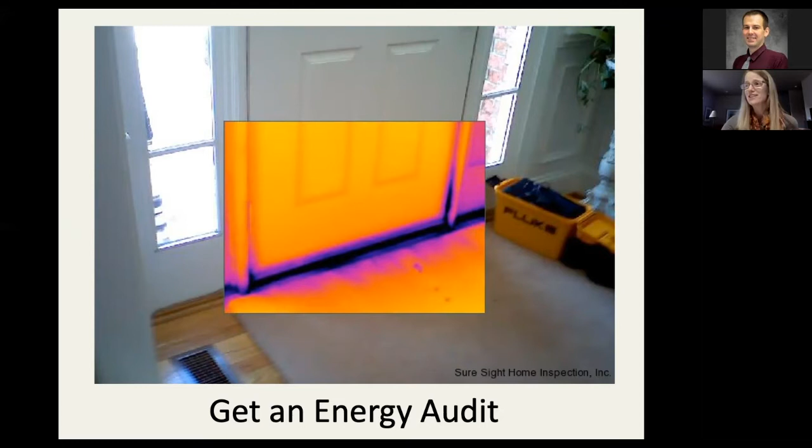And some larger businesses hire an engineering firm to do a more extensive audit. This is also a good investment because if you take any of their recommended actions, you'll earn the investment back pretty quickly through energy savings. Now, COVID restrictions may impact in-person audit offerings, so you just have to check with your utility to see what they have for you. The Green Iowa AmeriCorps used to offer in-person energy audits in the towns they served in Iowa before COVID, and they'll probably go back to doing it again after COVID.

And the first home they ever did was my home that was built in 1858. They came in with their fancy equipment, the blower door test and a thermal imaging camera. And they did an audit that revealed that the air exchange rate of my home was 50%. And they said, that's like living outside. It was definitely a drafty old house. And I see they're not doing in-person audits right now due to COVID, but you can sign up to get an energy saving kit on their website.

And if you're a business owner, I suggest you look at the EPA Portfolio Manager tool. It's the best in the industry and it's free. It's an online energy management and tracking tool that enables you to measure and track the energy performance of any building over time. They have free online trainings on an ongoing basis, and they have an excellent action workbook for small business. I'll drop the link to that page there in the chat at the end of my presentation.

And if you want to closely track your home energy use, the EPA also has a detailed tool called Home Energy Yardstick. You can learn about the latest in home energy saving solutions, and you can track your savings over time and see the impact of your actions. You can get a customized and prioritized list of energy saving recommendations for your home from the Energy Star Home Advisor, and I'll put that link in the chat at the end as well.

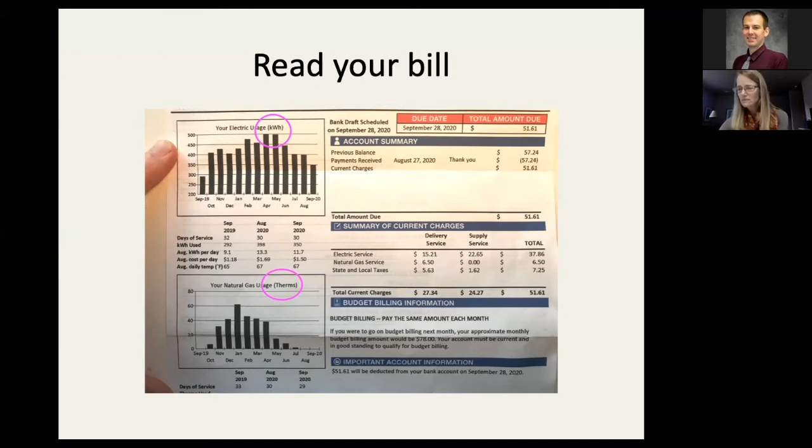Because you want to see if the actions that you're taking to reduce your energy use really make a difference on your bill. So keep track of that in whatever way works for you, and then make a plan. This is a long-term project, and having a work plan will help you get the job done. So to make a plan, look at your energy auditor's suggestions. They'll have written suggestions for you.

Look at the suggestions on the Energy Star website, either for the small businesses or for the homeowners. There are very clear steps on how to take specific measures to reduce on their website. And then figure out what you can afford. Here's some things to consider about that. You'll want to figure payback on chosen investments.

Yes, making some of these changes requires an upfront investment, and then you earn back what you invested in lower energy bills over time. Payback is the amount of time it takes to earn back your investment. Sometimes an audit by the utility company can figure out how soon you will have earned payback, or if you're a business that is considering hiring an engineering firm, they'll figure the payback for you. Figuring payback will help you decide what to invest in.

It makes sense to start with the measures that give you the greatest energy savings for the smallest investment. For many, that's lighting. Switch to LEDs. Payback is generally under 4 months for a lighting switch, and then you have continued savings after that. And then be sure to take advantage of incentives to help pay for the changes you decide to make.

You can see what's available in your area on this website. It's called Database of State Incentives for Renewables and Efficiency. You just type in your zip code to find out what you might qualify for. I'll put that link in the chat box also. There are rebates from utilities. There's tax incentives from the feds and the state listed on this website. There's loans, grants for businesses.

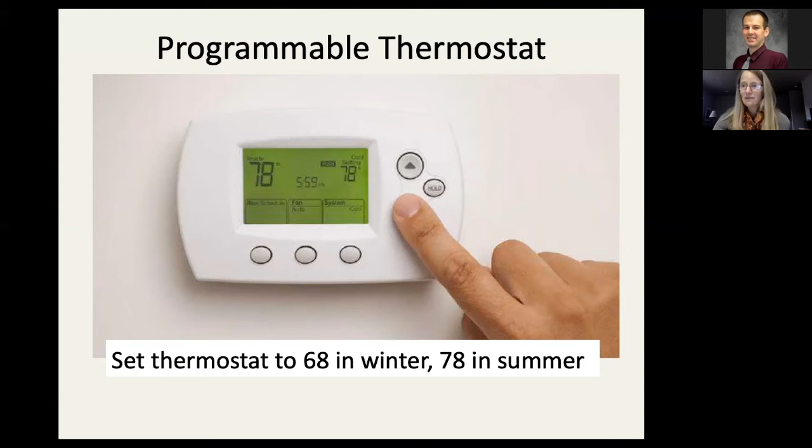And filters. It's a small thing, but it really does make a difference. Regularly replace filters on the furnace and clean filters on the air conditioner to keep air flowing properly. You don't want those machines to have to work so hard to push air through a blocked filter.

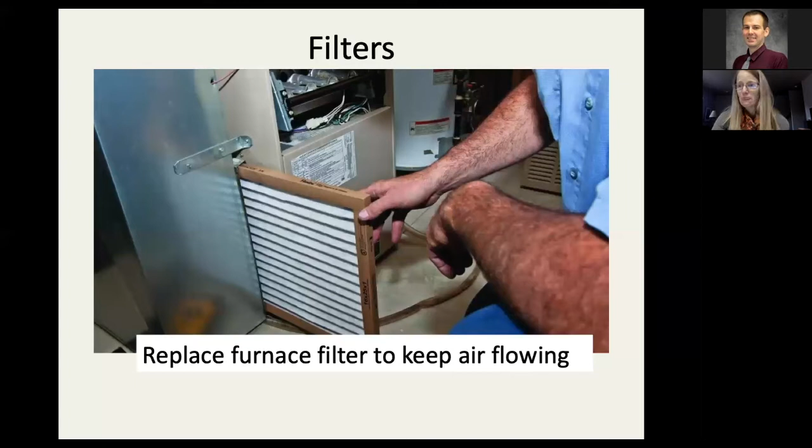And the next thing is get a tune-up. You should get an annual tune-up for your heating and cooling system. The minimal cost for a tune-up will be quickly recovered by operating the system correctly. Many congregations I've worked with have saved big bucks by getting a tune-up and properly operating their older boiler systems.

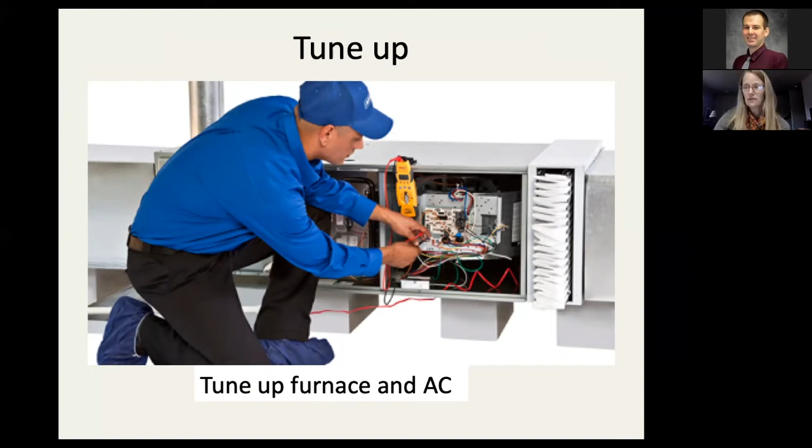And weatherize. You know, air leaks through the ceiling and the walls and the foundations and other areas typically are the greatest sources of heating and cooling losses in a home or any building. And if you don't tighten up your home first, money spent on insulation may be wasted. The average home has enough leaks to add up to the size of an open door.

So you want to plug the air leaks to seal your building envelope, such as add air gap window films to seal leaky windows in the winter. This is something that I used in my old house to make it a lot more comfortable in the wintertime.

Oh, and back to the Green Iowa AmeriCorps. After they discovered where the leaks were in my home, they spent the day sealing them up with caulk guns, foam insulation, and weather stripping. And they ended up reducing the leaks in my house from the size of an open door to the size of a window as big as a football. So I was very impressed. And the labor was and still is free. I just had to pay for the materials.

They also taped up the heating ducts for me to seal those up because I was losing heat through the heating ducts in the unheated basement. So Green Iowa AmeriCorps, I hope they get back on the ground soon.

You can caulk and weatherize around your windows and doors and tape up your heating ductwork yourself too. There were some really great YouTube instructional videos. This guy was really funny and accurate. But you may want to hire somebody to seal up the cracks where you lose your heat in your attic. That's a little more complicated. Remember to check for incentives from your utility to cut the cost.

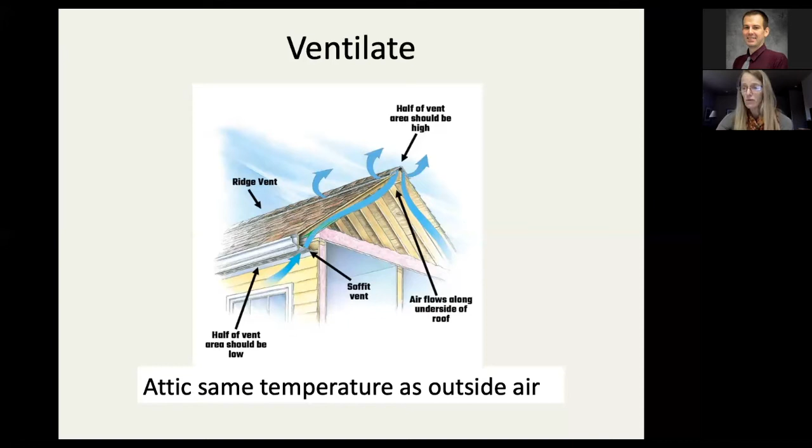And once you've plugged the leaks and properly ventilated your attic, there's still one more thing to do, and that is insulate your attic. You can warm yourself, save on heating bills, reduce problems caused by ice dams on the roof during the winter by insulating. During summer months, insulation reduces heat gain and keeps your home cool.

If you're tempted to do it yourself, I would advise you to check out this site that will help you determine if that job is for someone of your skill level or if you should hire a contractor. Many utilities offer incentives to help with the cost. The recommended R value in Iowa is now up to 49 to 60.

I hired a company to seal and insulate my attic, and my municipal utility gave me a great rebate, and they did an excellent job. And the resulting temperature in the summer was indeed 15 degrees cooler. It was such a relief. And in the winter, we no longer had a problem with ice dams.

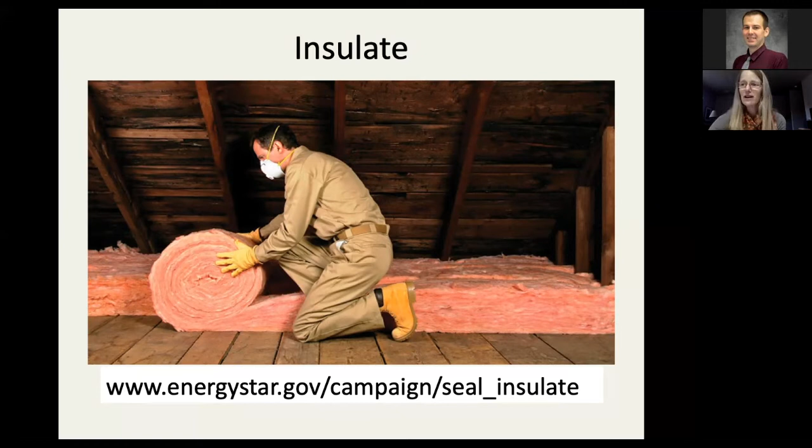And I know this next one sounds really obvious, but I have been in homes where people don't do this, and it's such an easy way to save energy. Don't forget to install your storm windows in the winter if you have that type of window. My house had the old aluminum frame combo windows, so I simply needed to slide out the screen and lower the storm windows. So don't forget to lower your storm windows.

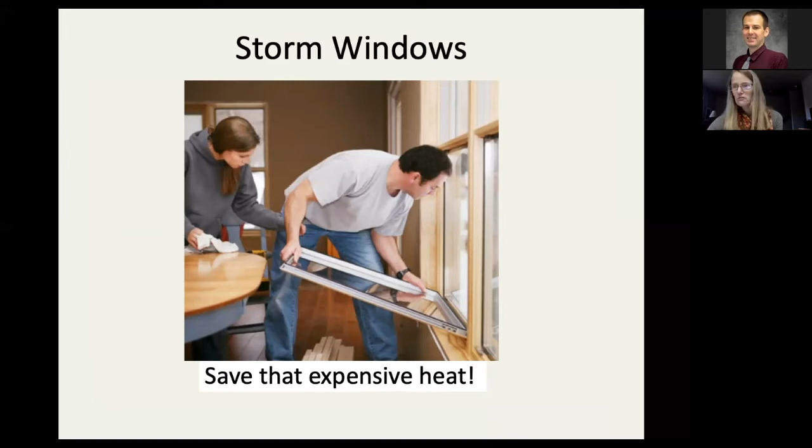And this next one is handy in the summertime. Reflective window films on your south-facing windows in the summer can reduce energy consumption by reducing the solar heat gain and cutting cooling costs by as much as 30%. It still allows natural light to enter without the harsh glare, and those are pretty inexpensive to install.

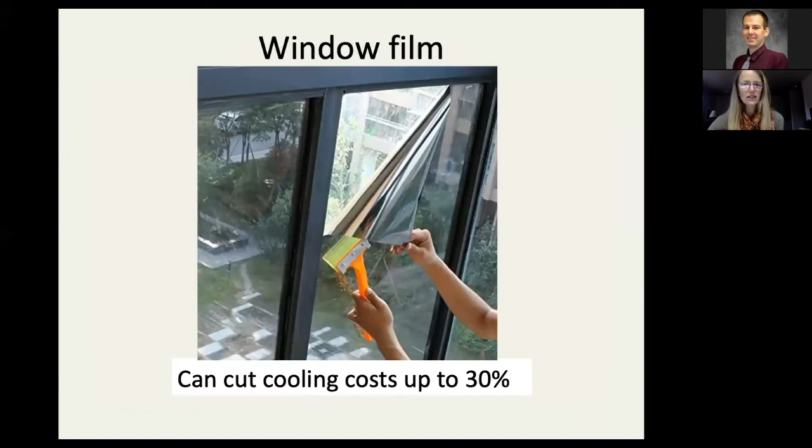And here's one other thing that doesn't cost too much and makes a difference. I had a house full of 3 teenage girls who loved to take long showers that caused a lot of hot steam to build up in the room. So they'd turn on the vent fan at my request, and then they would leave it on when they left the room. So it would run for hours.

So after the steam cleared, the vent would just continue blowing the conditioned air out of the house. In the winter, we were losing the heat, and in the summer, we were losing the air-conditioned air. So I had a timer installed on the vent fan, and that solved the problem with no arguments. You can set it for 5 minutes, 10 minutes, 15 minutes. That was a slick solution.

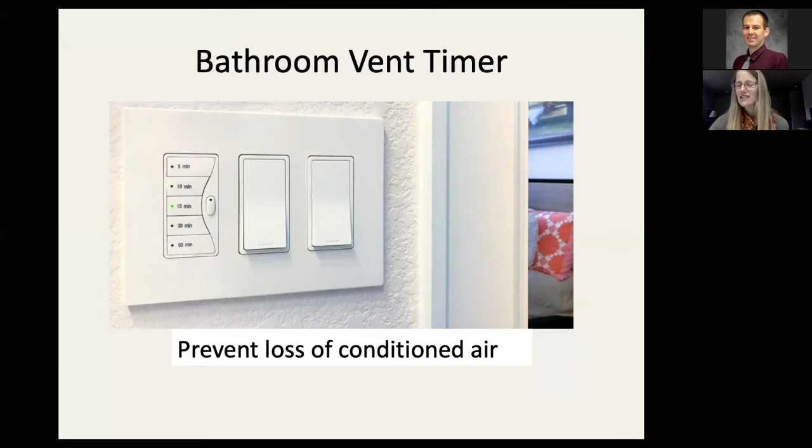And here's another one. Plant trees next to your home to regulate the temperature of your home. Evergreens on the north and west will break the cold winds, and deciduous trees on the south and west will provide cooling shade in the summer.

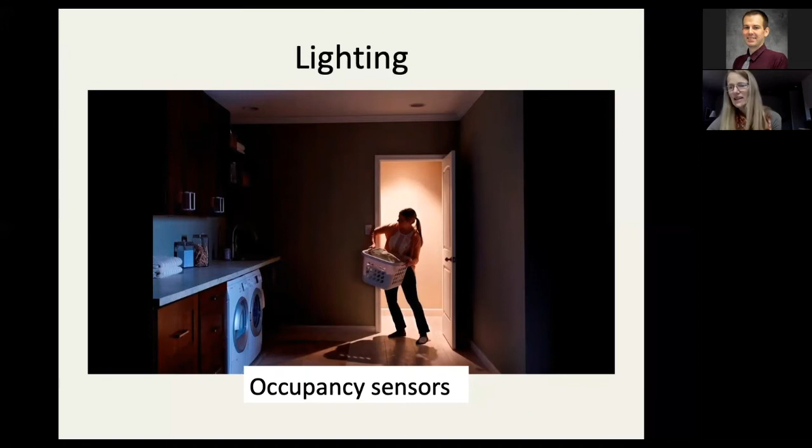And if you use holiday lights, use the new LED strings. They come in warm white and lots of colors and shapes now, and they use 85% less electricity than the regular ones. And many utilities offer to recycle the old strings as they contain valuable reusable copper.

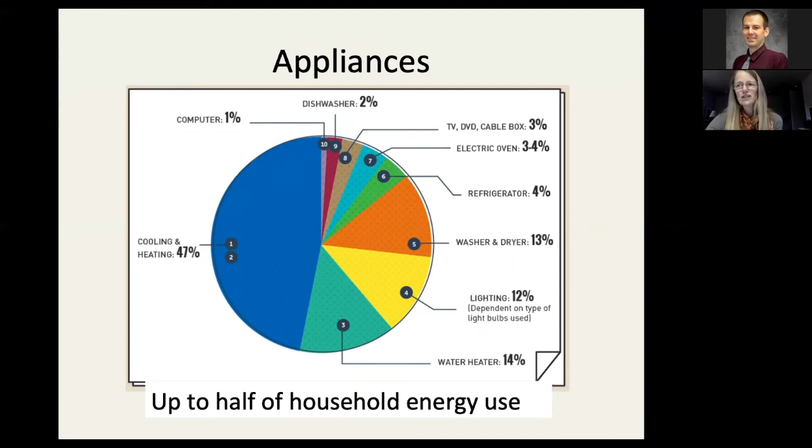So let's go on to appliances now. Appliances can count for up to half of your household's energy consumption, with refrigerators, freezers, and clothes dryers at the top of the consumption list. Your refrigerator, let's start there. This is a really simple thing that people don't know about. Vacuum your refrigerator coils on a regular basis. I do this every year when I go to my daughter's house. Each time I get off enough lint or whatever that is to make a small blanket. It's really thick. Keeping these coils clean can reduce the amount of energy your refrigerator uses by 30%.

Some coils are underneath the fridge, like in this photo, and some are in the back. You will have to pull it out from the wall to access them. And when you push it back, be sure to leave a space between the wall and your fridge to allow the air to circulate. The same thing applies inside your fridge. It needs air to circulate around inside to operate efficiently. So you may want to clean it out occasionally.

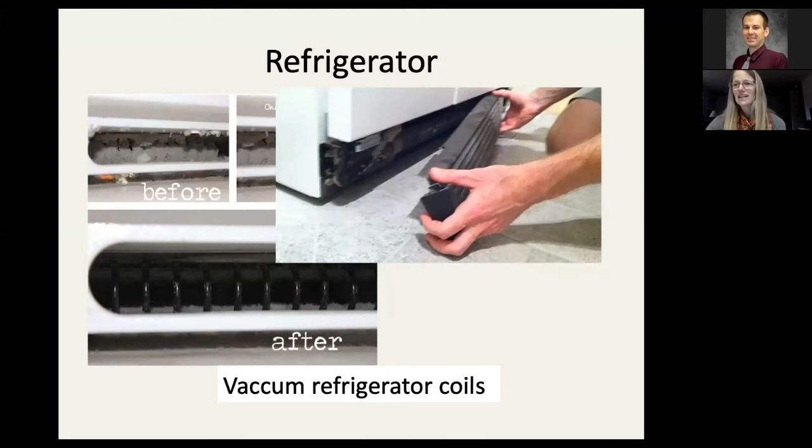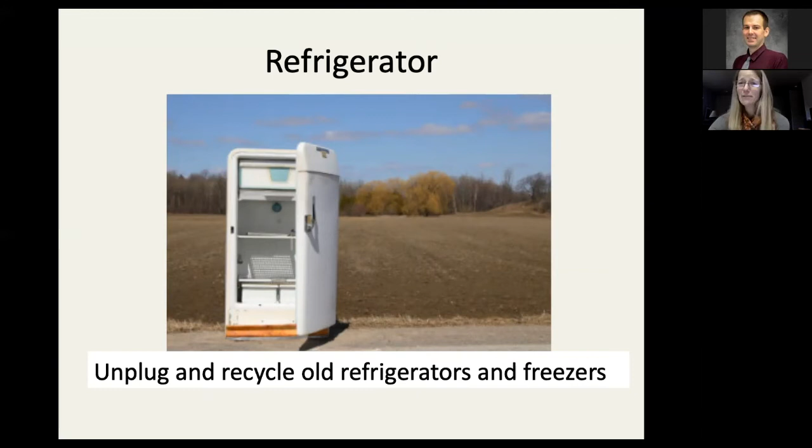Refrigerators and freezers are energy hogs because they run 24/7. Unplug and recycle your old refrigerators and freezers that are not used often or don't have many items inside. Some utilities pay you to recycle your old working appliances. I have seen refrigerators in people's basements that have a pack of batteries in them, and that's all. So please unplug and recycle your old refrigerators.

And here's another step. Consider allowing some of your laundry to air dry. Anything that creates heat uses a lot of energy. If you can hang it outside, the sun actually does a better job at killing bacteria than a hot dryer. And all that lint in the lint catcher in your dryer, it's bits of your clothes coming off, wearing out your clothes. Your clothes will last longer if you air dry them.

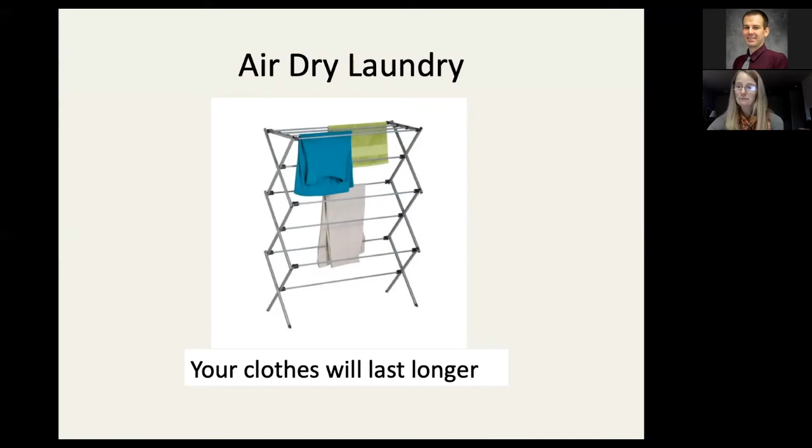And the dishwasher, set it on air dry. Just open the door to let the dishes dry. If you do it as soon as it's done running, all that steam will rise into the air and take the water off your dishes. Use the energy saving setting and only run full loads.

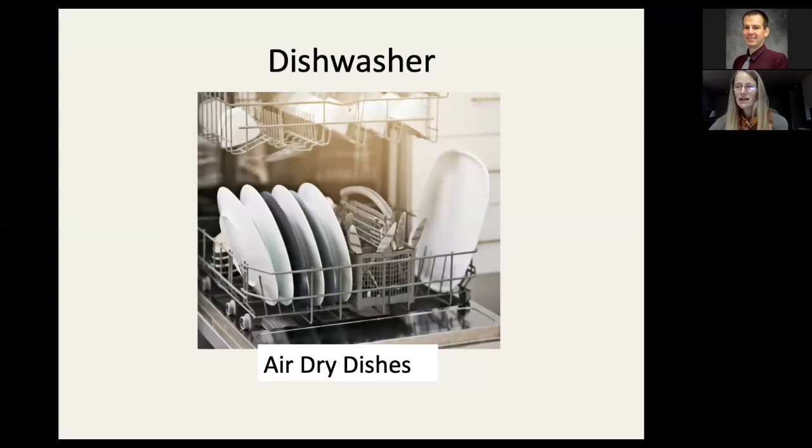And here's another tip for the kitchen. Cook with electricity. The future of our energy system is to go electric and get those electrons from renewable sources like the sun and the wind. Your microwave uses far less energy than a cooktop and oven. Induction is a new way to use electricity to cook on a stovetop. It's 50% more efficient than gas or standard electric cooktops.

I use a portable double burner for induction cooking, and I love it. You can set the temperature to 5-degree increments. It's a NuWave brand that we bought online for about $200. We just set it on top of our glass top electric stove, and we no longer use our old electric stovetop. We are much happier.

Well, now let's get out of the kitchen and go into the office and take a look at our computers. You should set your computers on energy saving mode. You can save as much as 75% of the energy used by your computer if you put it into a power saving mode when you won't be using it for extended periods of time, and enable power management features during shorter periods of inactivity. Or if you can, turn it off entirely at night or in days when you know it won't be used. The Energy Star website has really clear instructions on how to do these things for all the different computer setups.

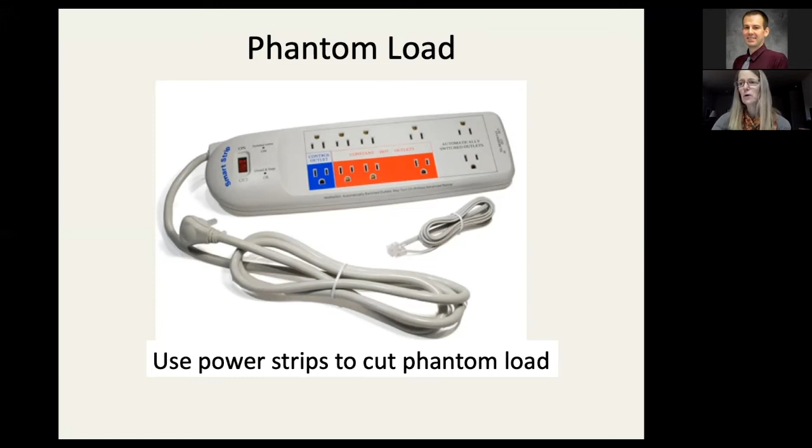And now let's talk about water. You're going to want to set your water heaters at 120 degrees. You can save up to 10% of your energy use from the default manufacturer setting, which is 140. Doesn't need to be at 140. 120 is the required temperature for dishwashers. And nowadays, a lot of dishwashers have a booster, so you really don't even need to set it up to 120. You could get by with 110.

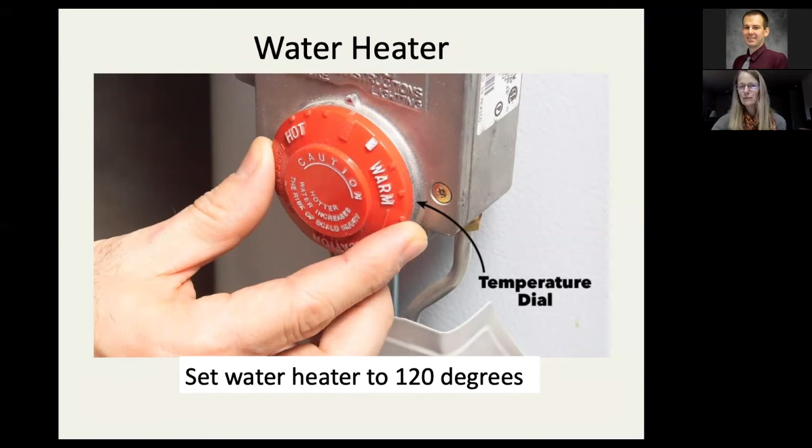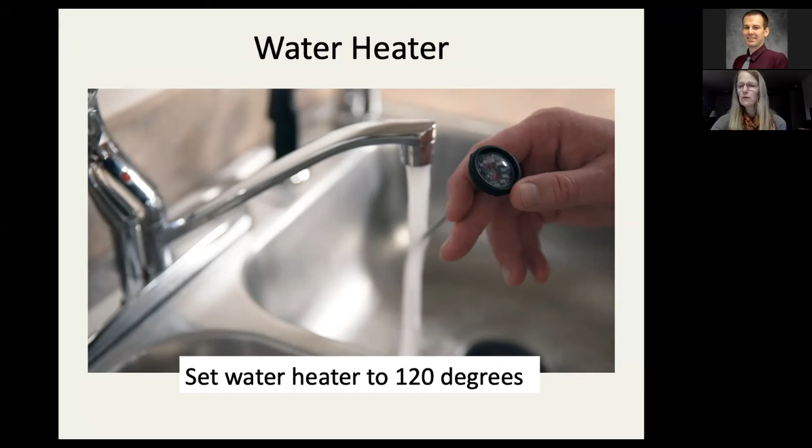So most water heaters don't have an exact temperature dial like this one here. So just hold a thermometer under running water to see what the temperature is, or let the hot water run into a mug and put the thermometer in the mug. And more on water, wash your laundry on cold or warm, not hot water. Heating the water for washing clothes constitutes most of the energy that a washing machine uses.

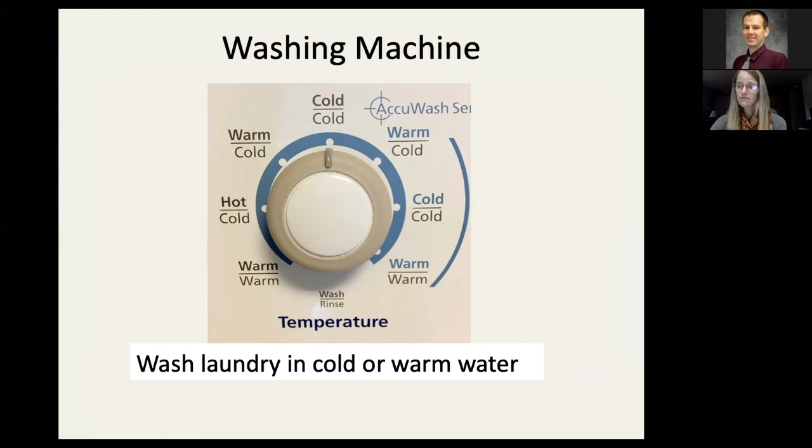And use low flow shower heads and faucet aerators to cut the use of hot water. We are all washing our hands a lot more now due to COVID. I was just reading about how the 1.0 aerator cuts 50% of water flow compared to the 2.2 aerator that is commonly used. And it does it without reducing water pressure. So you might want to try out the new aerator.

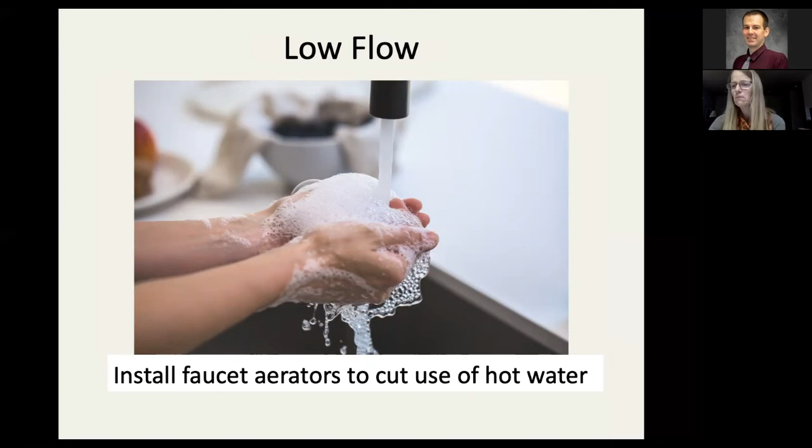One more thing on water. Install hot water pipe insulation. These foam insulators are really easy to snap on yourself. Follow the pipes from the water heater, the hot water pipes, and then see if you need to insulate them under the sink. The pipes under the kitchen sink in my old house were against a cold north wall, so insulating them helped keep them from freezing in the winter when we were gone.

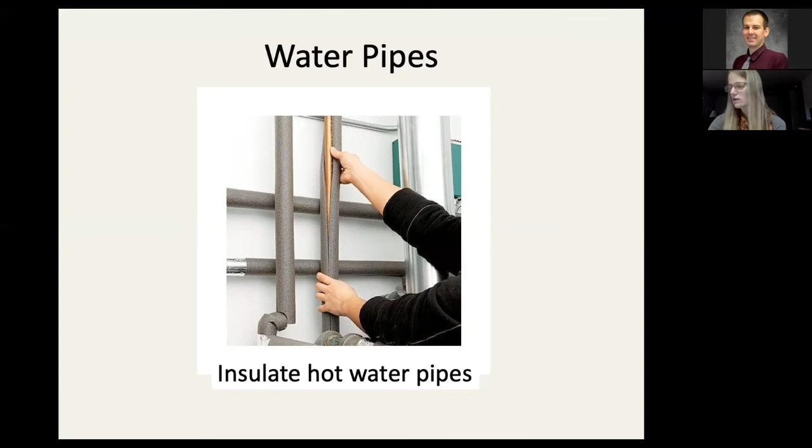Pretty soon, you're going to be so interested in saving energy that when it's time to replace your furnace and air conditioner, you will consider a geothermal heating and cooling system. Geothermal pumps up the steady temperature of the earth, about 50 degrees, to heat and cool your building. That way, you only have to heat and cool your home from that steady 50 degrees, rather than starting from Iowa's freezing winter air temps and ghastly hot summer temps.

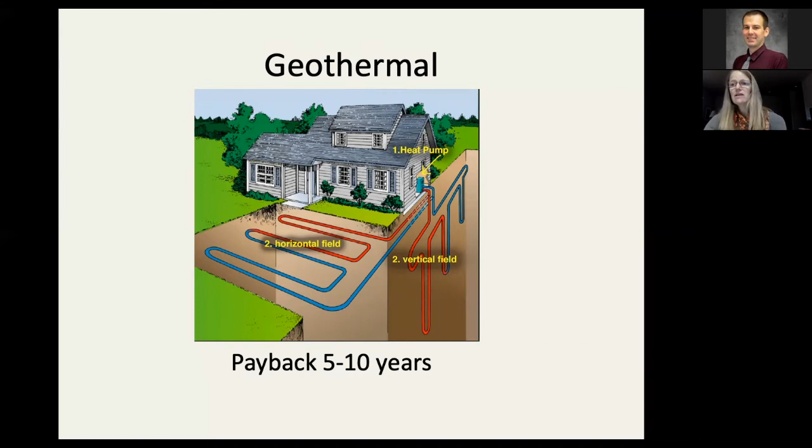So there's two ways to install the pipes that circulate the fluid that carries the earth's temperature into your building. One is horizontally, which is generally cheaper if you have the space to do this, and one is vertically, which is more expensive but takes a lot less room. You can see both types in this drawing. And there's even an add-on to this system that you can get to heat your water. So these systems often lower the heating bill by about 50% and the cooling bill by about 30%. And there are tax incentives from both federal and state for this.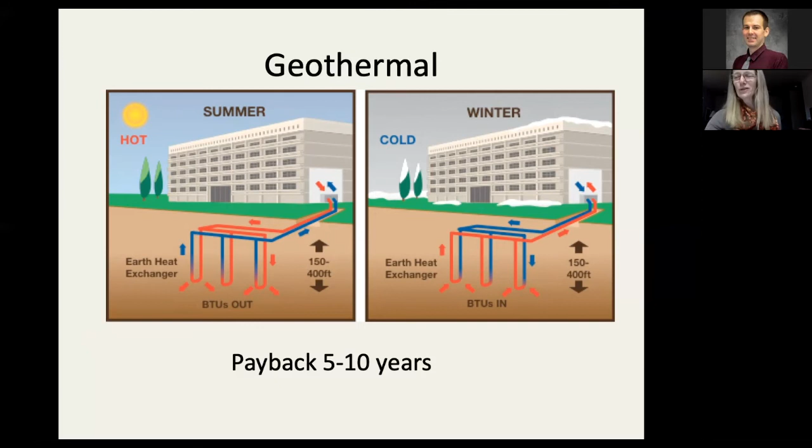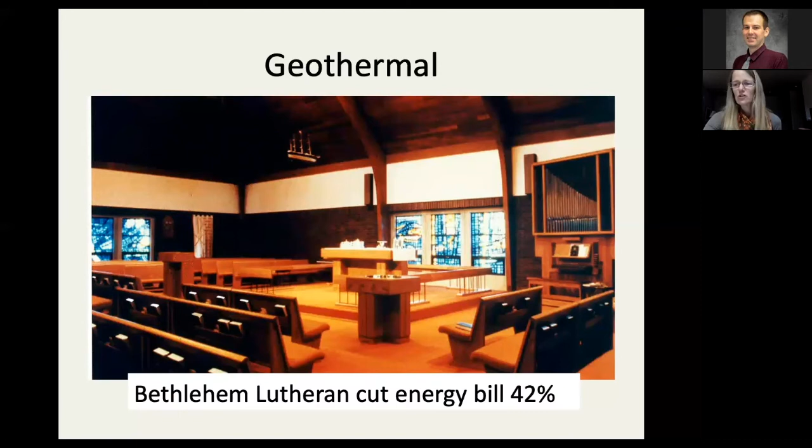Here's a couple of examples. Bethlehem Lutheran in Cedar Falls installed geothermal and cut their energy bill nearly in half. And they reported a greater level of satisfaction with the comfort of the building temperature. No more hot and cold blasts, just a steady, even temperature the whole time. The Cedar Falls Public Schools installed geothermal in all of their buildings and achieved payback in just 4 years because the building is used so heavily.

And for a really awesome vision, the Moodharts, some friends of mine in Dubuque who reached payback for their home geothermal system in 7 years. And that was 3 years ahead of time because it performed better than expected. And then they decided to invest in solar. And so now they are zero carbon at home.

Or, you know, if you have all electric geothermal and all electric appliances, you will be positioned to be carbon free when Iowa reaches 100% of its utility electricity generated from renewable resources. So there's a vision to end on. I'd like to open up to questions now if we have any.

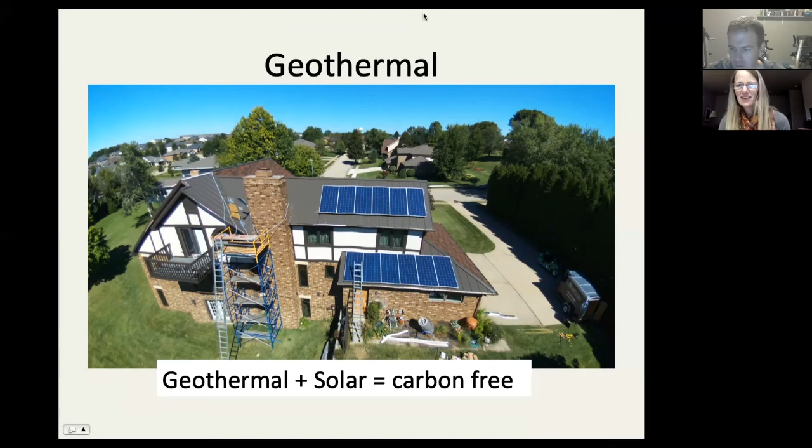Sure. I actually had a couple questions. And I'll unmute the others here as well.

So, is there anything that you found, in addition to what you said, of course, something out there that people commonly do that is a huge mistake, or a product that's a big mistake? Like, do the Instant Pots cause a huge amount of energy use, or something like that? I'm not really familiar with Instant Pot, but if it's a pressure cooker, it actually saves energy, because it takes less time. Okay.

Yeah, and if you want to be in the kitchen right now, I can tell you one common mistake people make is to cook without the pot lid on. It takes far less energy to cook that food if you leave the lid on. That's a really easy one. And stovetop cooking takes a lot less energy than baking things in the oven. So that's another really easy one.

Yeah, I was surprised. To add on to that, my personal experience is we've had two unfortunate instances where our air conditioning went out in the summer, and it's amazing how much just cooking something on the stove heated up the house. Yes, yes. There's a lot of really great summertime meals that you can eat that don't involve any cooking. And we started doing more with the grill.